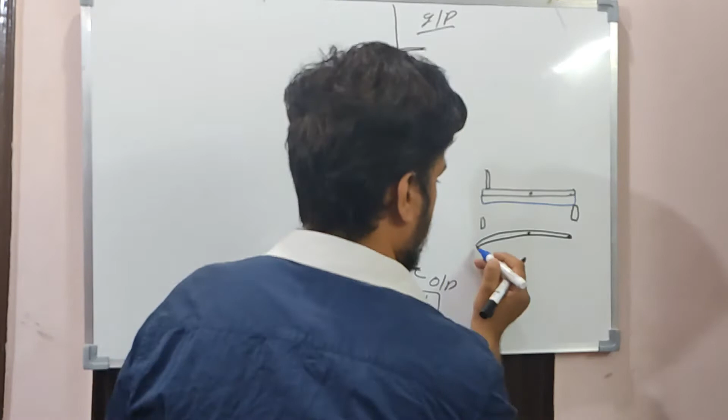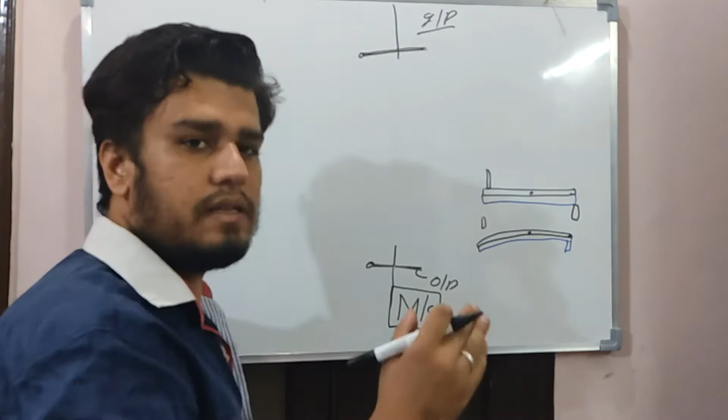So if I am fixing this point from here and this point from here, when I start heating these points, it will contract and start to bend in this position. If I am giving one connection here and one connection here, when it starts to bend, it will be like in this position. Then automatically the device is protected as the circuit is incomplete because of this gap. But there is much more than this bimetal strip in an MCB, and we are going to discuss that.

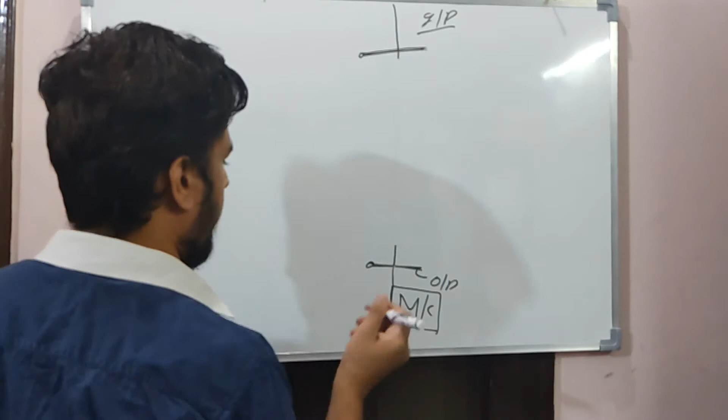So basically I am placing this metallic strip over here, near to the second terminal. I am connecting these to the second terminal, which are fixed from here. Here is a bolt from which you fix it to the rod or to the ACDB distribution box. You fix this box in this manner.

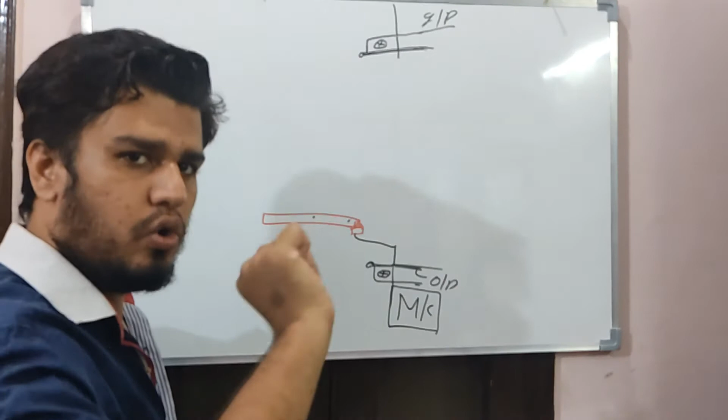Okay, so after this you have a triggering circuit that you see from the outside; there is an on and off knob in the MCB. That is over here. Sorry. This is on condition, on, off.

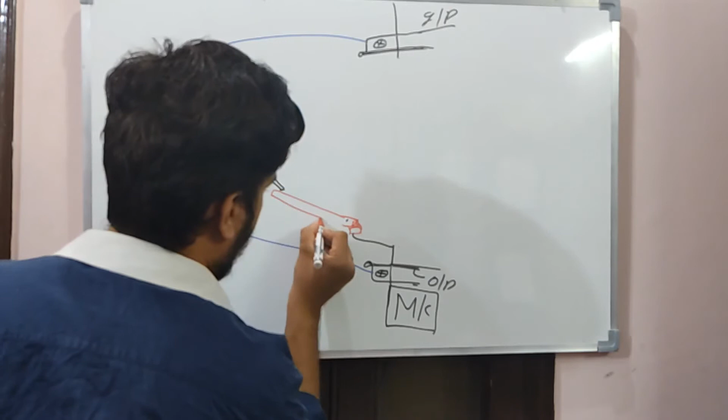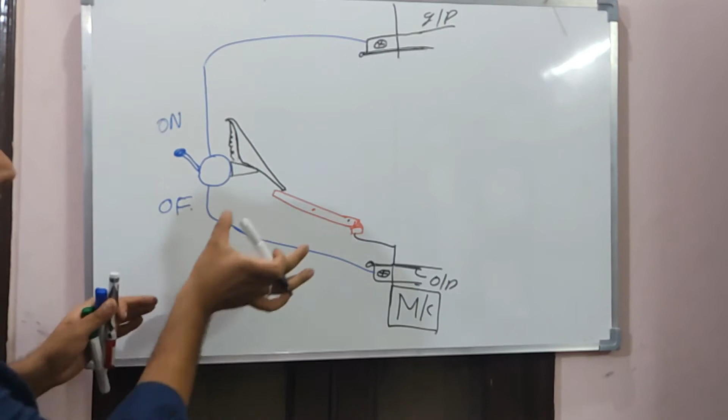Okay. So now I am connecting this with a triangle-like structure hinged with the springs. This is slightly touching this triangle. Here is a secondary spring over here as well. I will make it right now. So you can see that here is a connection, but you still don't know how to connect this metal rod with the input terminal.

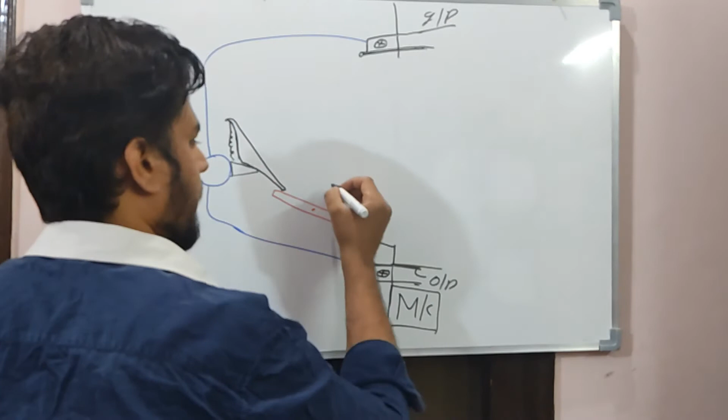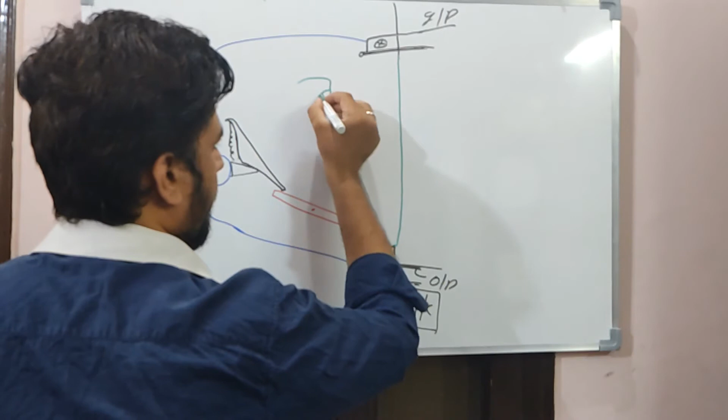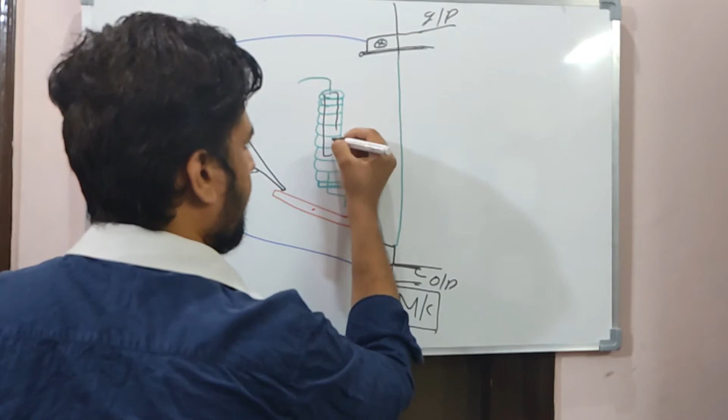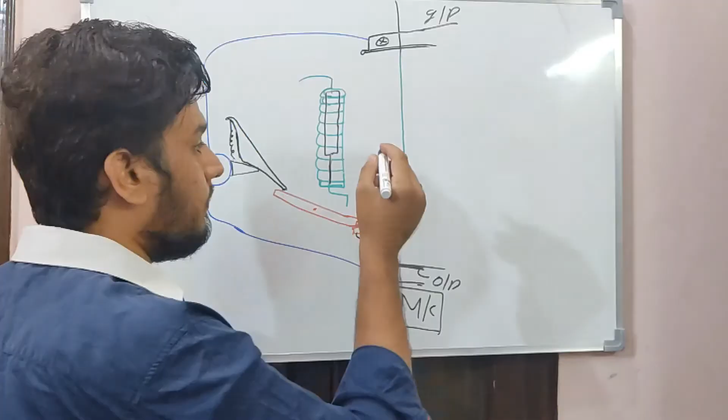Okay. So now here I am bringing the next material. This is a coil-like structure which has a magnetic field and a pre-installed weighted cylinder in it. The basic mechanism of the automatic MCB is this cylinder, and here is an arc chute.

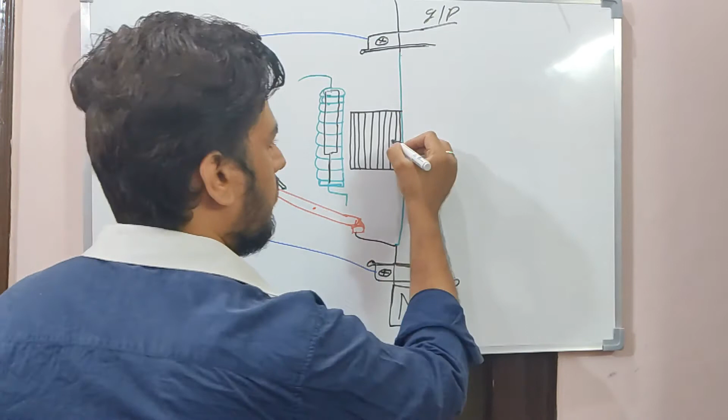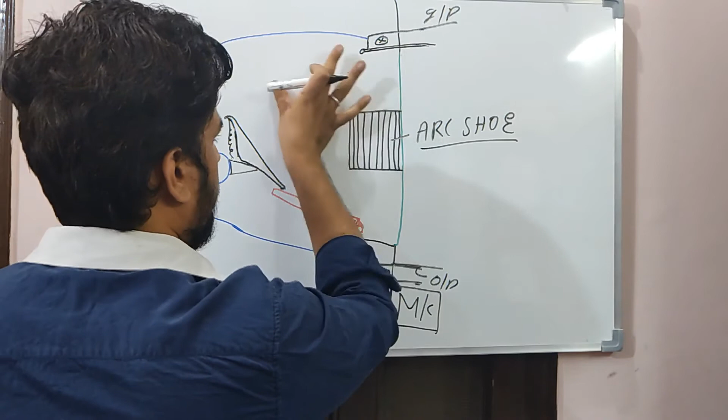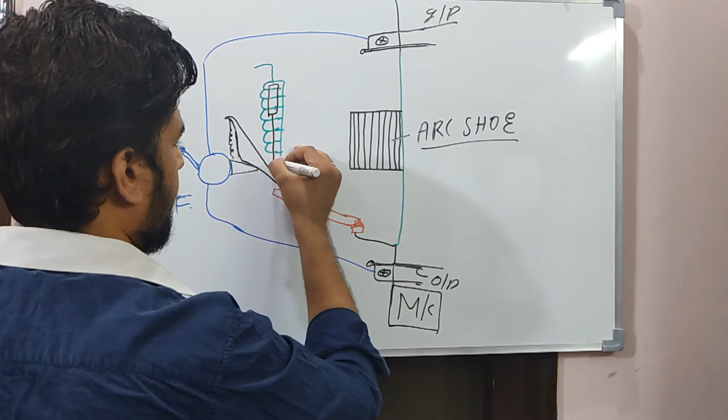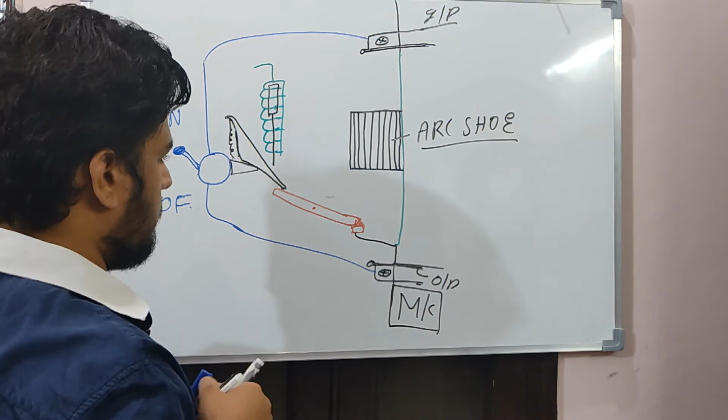This arc chute plays a role to neutralize the arc which is developed between the terminals when the circuit breaker breaks the circuit. I think I have made this too close. 1 second. I will make it again. So this is the arc chute, this is the mechanism to break this connection, and this is the circuit. And here is the arc.

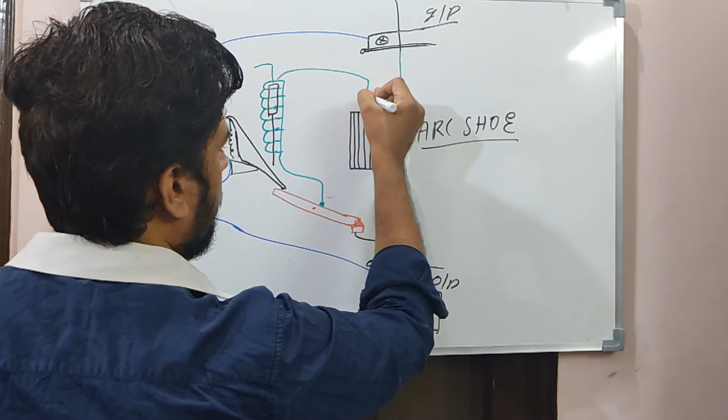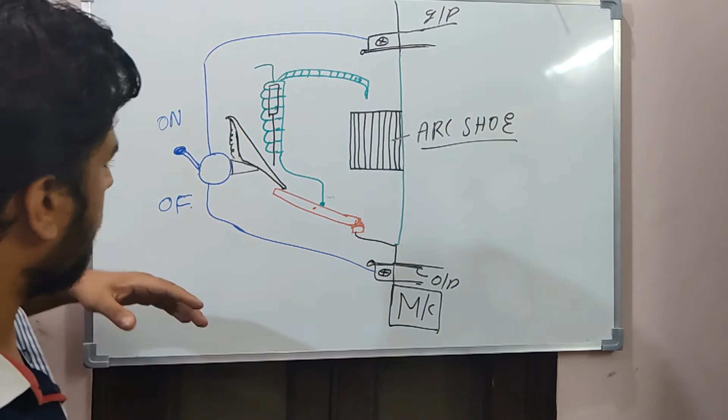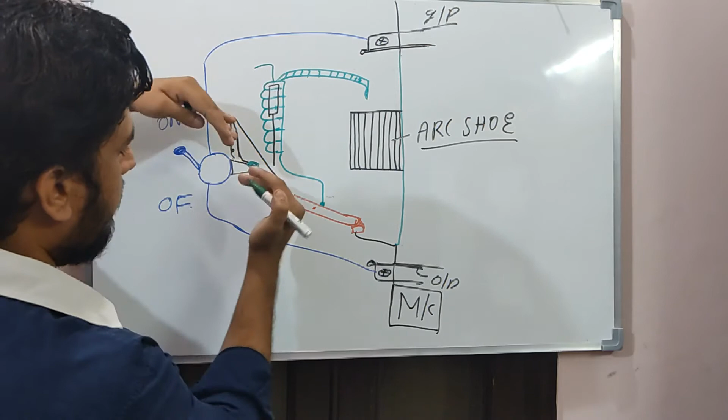So basically when you switch off the circuit manually, this is hinged together. You are pulling this terminal upward, and this point will drag this bimetal rod downward, and it will break the circuit from this position.

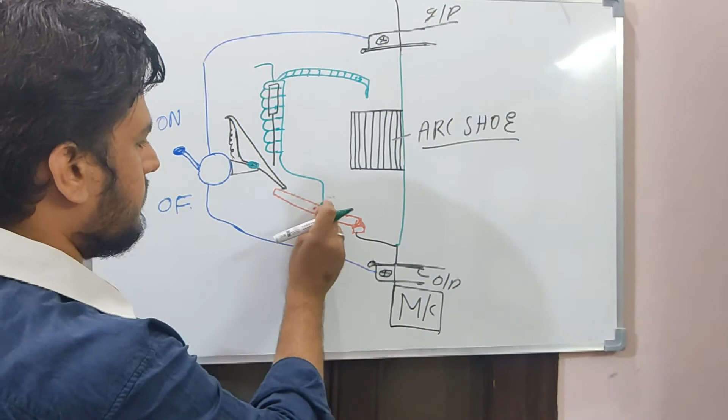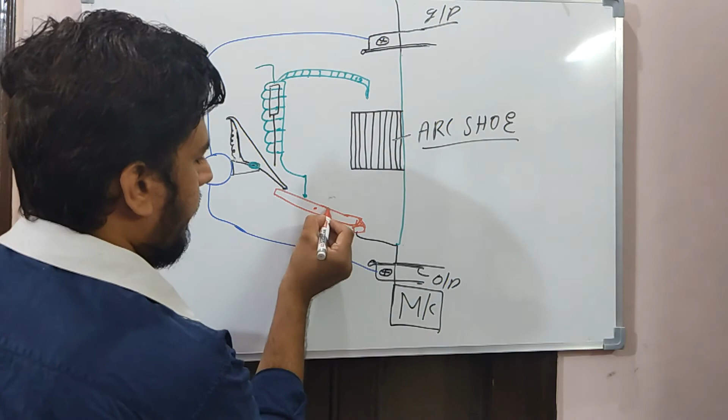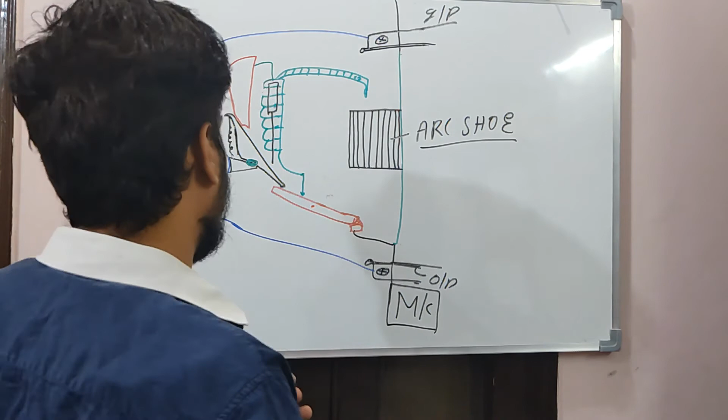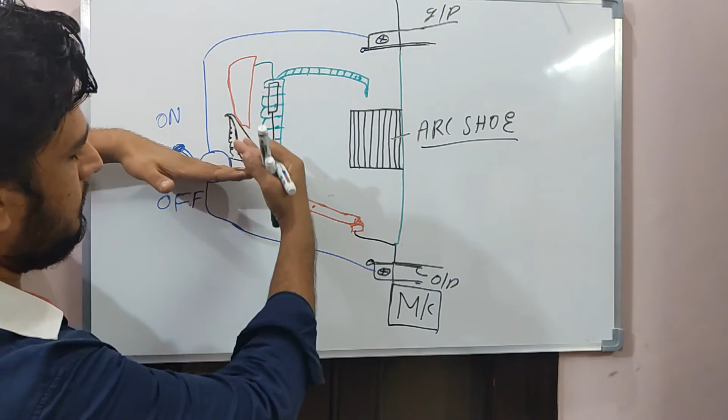And so now the second phase, that is the automatic circuit. Here this metal rod is supported by a device which is holding the magnetic flux. Here it is off, O-F-F. I explained to you the manual mechanism, that when you turn it off, this pulley will move downward, and this will make a gap between these two terminals, and the circuit will break. And this is from here.

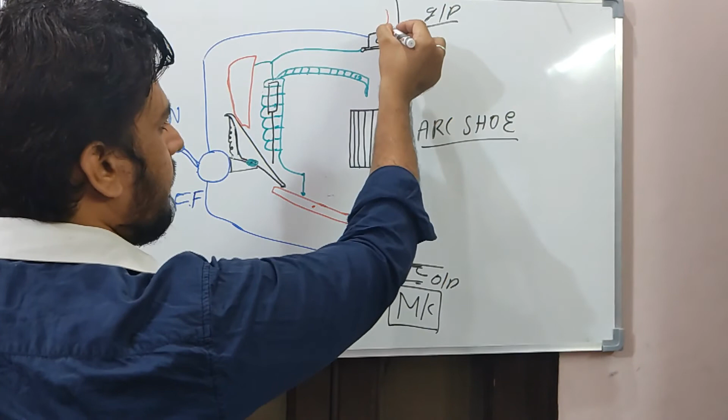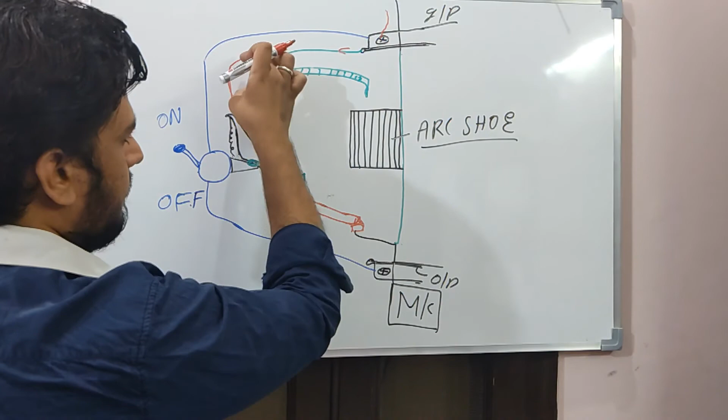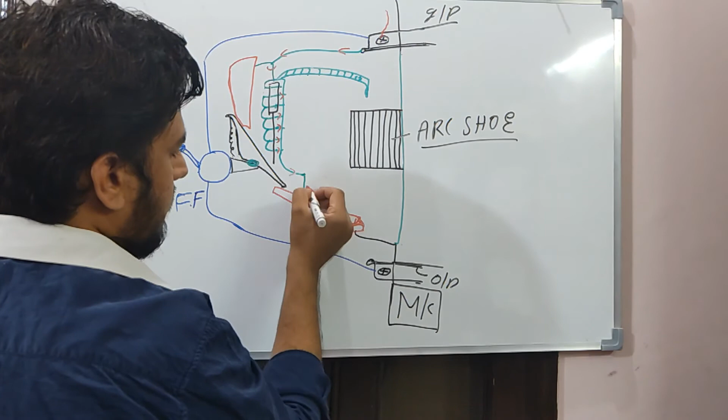So now, when will the MCB automatically disconnect the circuit? The wire is connected here. The power is received from this end, it goes through this coil, makes a magnetic field, and acts like a mechanical support for this cylinder. Basically it is supporting this cylinder from outside the coil, and it is passing the current from this to this circuit and to this point.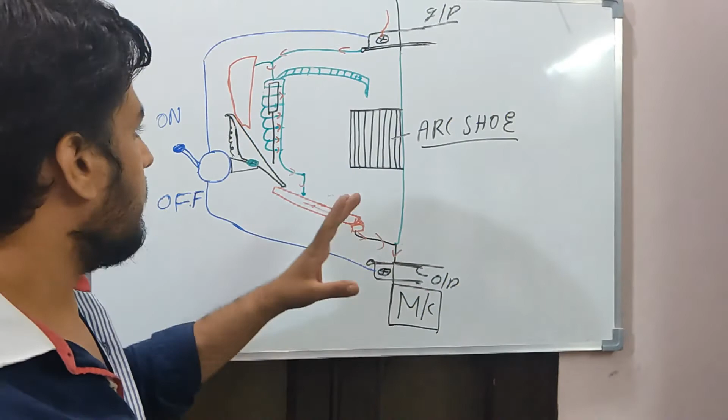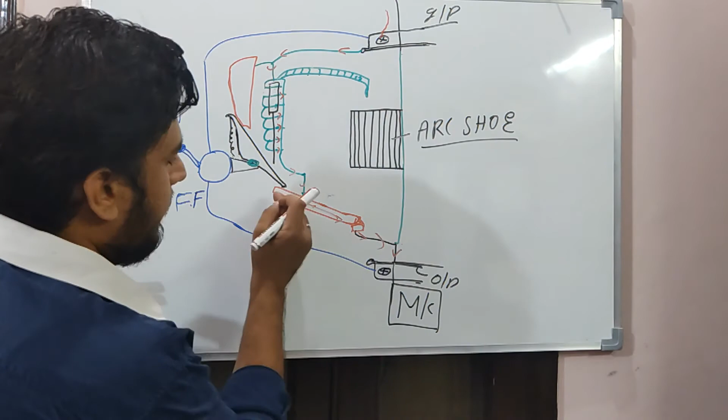So whenever the current is increased on the terminals, the magnetic field generated by the coil, which is holding the cylinder upward, is increased and crosses the limit, and the cylinder falls to this particular pulley, and this spring helps it gain strength and break the circuit by moving this bimetallic rod to this position and disconnecting it. So when this pulley hits this bimetallic rod, it will turn to this position.

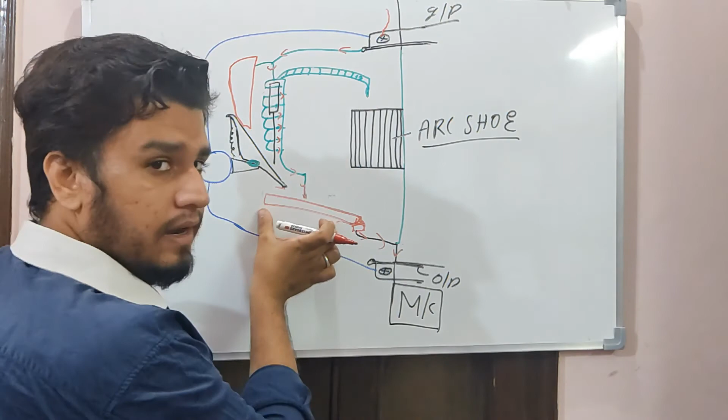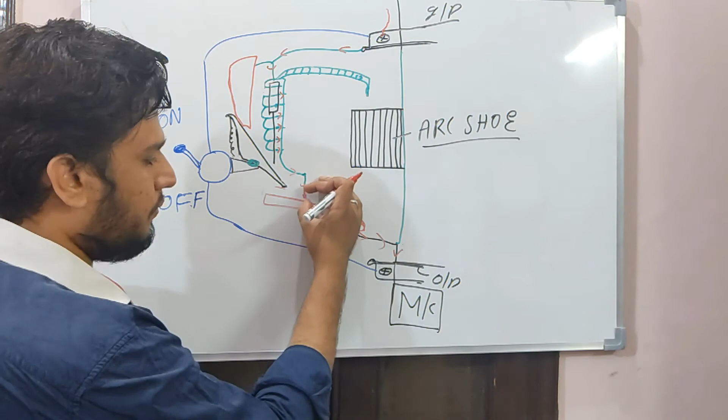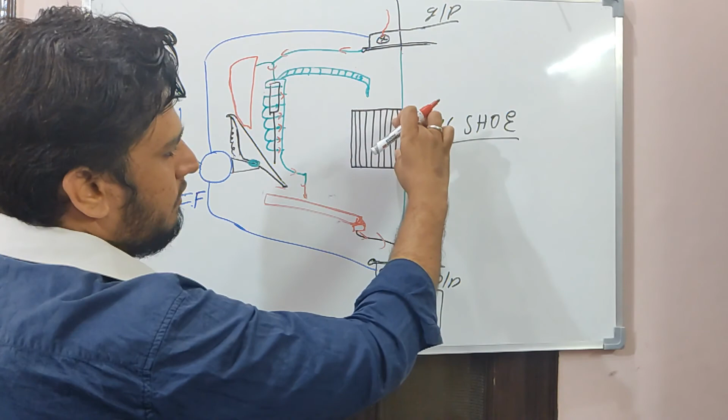In addition to this, as this is a bimetallic rod, when it gets heated, it will also bend a little towards this side and help make a greater gap between these 2 points, so that the circuit can easily break and current cannot pass through the little arc. But also when the circuit breaks in a very small period of time, an arc is created between these 2 points, which collides with this arc chute, which consumes it and settles it.

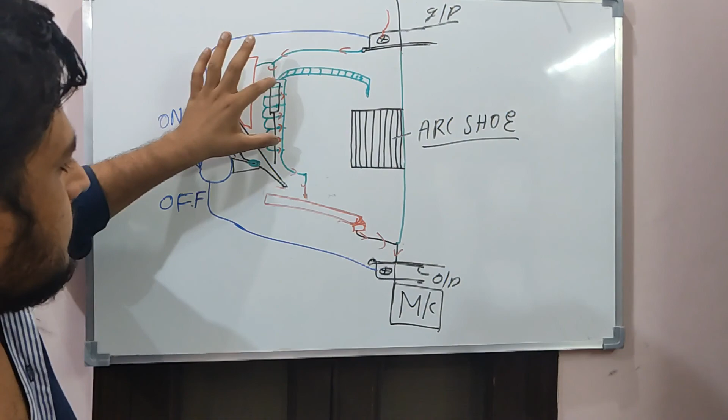So I think I have tried to explain the MCB in the simplest manner. It is quite complex, but I think you can remember these points: the cylinder, the pulley, and the bimetallic rod, which are the key points holding the manual and automatic circuit breaking of an MCB.